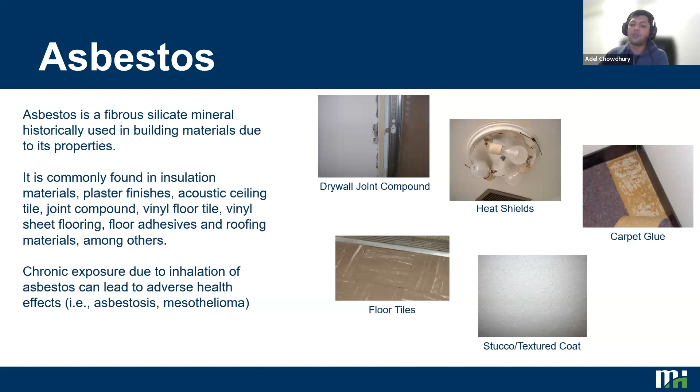You could have asbestos in door caulking, sealants, in textured coatings on paints, interior and exterior, on roofing materials, and some harder to get materials such as gaskets and mechanical insulation materials in special spaces like that.

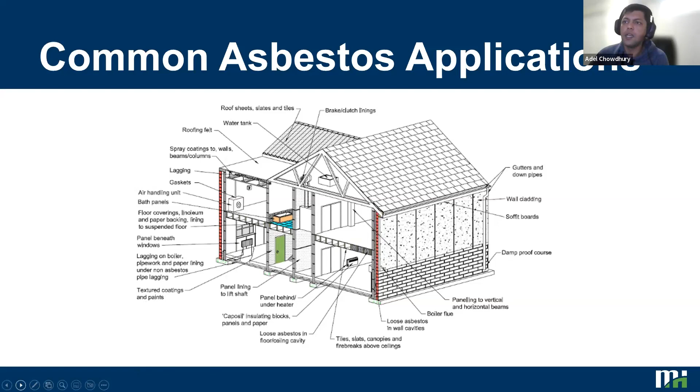Moving on to mold. Mold is also a common thing observed in residential condos, and it's more of a hazard because it often goes unnoticed for long periods of time. It can be hidden behind walls or above in attic spaces. Now, mold is a fungus that grows in the form of multicellular filaments. It produces spores. The spores are what is harmful.

Generally, as I was saying, it's found in damp, dark, steamy areas. It could be in bathrooms, kitchens. If you have a recent flood, it's in basements, plumbing spaces. Areas with poor ventilation are also a good source for mold.

And the hazards of mold vary depending on people and their susceptibility. Most common symptoms are runny nose, eye irritation, skin rash, cough, congestion, aggravation of asthma. Again, it's a fungal spore-based hazard. So the main idea is if you see mold growth, as you can see, there would be some signs of it.

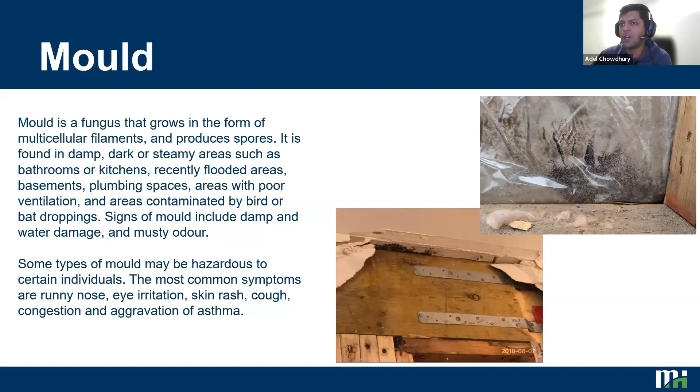The signs would be moldy smell. You would see dampness where dampness shouldn't be. You would see signs like these black spottings where mold is growing. They generally require a substrate to grow on, and the most common, very good substrate is insulation material, drywall, anything that a fungus can grow on. It wouldn't be, for example, a concern on metallic surfaces.

Now, there are other designated substances, and I'm not going to go too deep into them because the applications of all these designated substances can be pretty extensive. They can be found commonly in most residential places, but a lot of these designated substances are also more focused on commercial and industrial spaces as well. So I'll just focus on a few that are more commonly found in residential spaces, lead being one of them.

Lead is commonly found in old paint. Now, under the regulations around lead, it's still allowed. Legally, you could have up to 90 ppm lead in commercial residential paints available right now. So it is available. It is something that is not based on time, whereas asbestos, for example, is more of a concern in older houses.

Lead could still be present in newer houses, especially in specialized paint or paint on specialized surfaces, like paint on metals, paint on utility pipes, reflective paints, things like that, which would still have high lead content. Now, the issue is they can cause developmental and behavioral problems in children. So houses with kids are a special concern for lead.

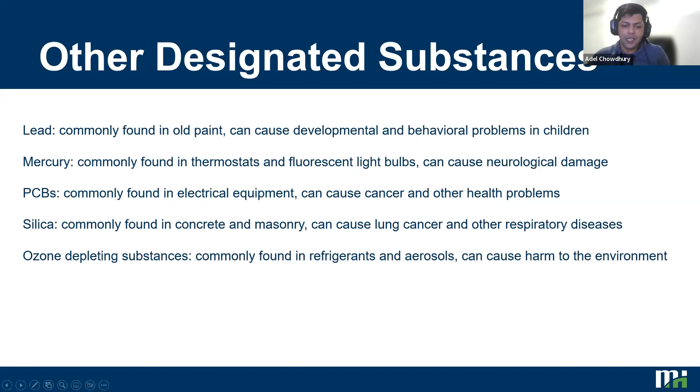Now, quickly to touch base on the regulations, there are, as I mentioned, regulations defining designated substances, and regulations that are in general present to guide us for how to manage hazardous materials. There are two acts specifically that are pertinent in Ottawa or in Ontario. That's the Occupational Health and Safety Act, and there are two regulations under the Act: Reg 490/09, designated substances, and 278/05, designated substances specifically for asbestos on construction projects. And the other act is the Environmental Protection Act.

Now, the Occupational Health and Safety Act, in general terms, specifies duties of owners, employers, and others to protect workers from health and safety hazards on the job. These duties include taking precautions to protect workers, acquainting a worker or a person in authority over a worker with the hazards in the workplace, and handling, storage, use, disposal, and transport of hazardous materials. The Environmental Protection Act, on the other hand, is for the protection of the environment and managing hazardous waste in a safe way.

Now, Section 30 of the Occupational Health and Safety Act specifically requires that a list of all designated substances at a project site be provided to all bidders at the tendering stage, and that the constructor for a project shall ensure that each prospective contractor or subcontractor for the project has received a copy of the list before entering into a contract. So this is where the regulation really starts applying.

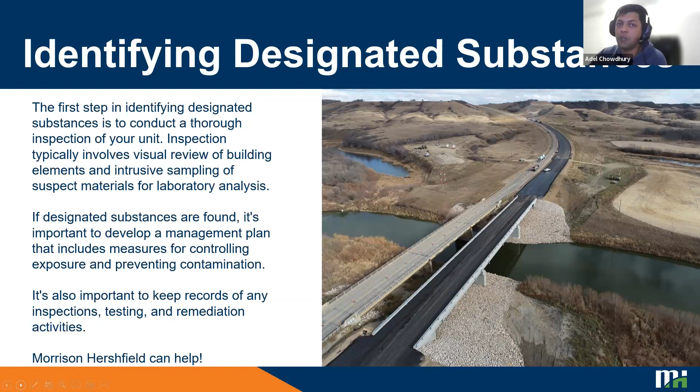And Morrison Hershfield can help. Environmental consultants in general can help. Consulting services available by consulting engineers: designated substance survey, as I had mentioned. Now, there are two types of designated substance surveys. You could consider a baseline designated substance survey or a project-specific designated substance survey. A baseline survey would be you carry out a designated substance survey of your entire property, where the consultant would go and inspect a reasonable number of units to represent the whole condo complex, to identify any designated substances present, and they would prepare a report that would cover the whole property.

Whereas a project-specific designated substance survey would be if you have a project in mind, for example, let's say you're doing a siding replacement for your building. We would only look at the areas to be impacted by the project and identify any designated substances there to provide to the contractor directly who is working on the project. Now, that may not apply to the rest of the property. It would mostly be specific to the project area itself.

Now, the service does include a visual inspection, but it also includes intrusive sampling of suspect building elements. So during a designated substance survey, there will be minor damages to building elements as we collect a sample of, let's say, drywall joint compound or a ceiling tile or a piece of floor tile. And we would do patch repairs where we can and try to find places for sampling that are more inconspicuous, not right in front of you. The other thing is the DSS generally does not include sampling of inaccessible or embedded materials. Now, this is a concern if you're doing a very large scale demolition project. You might want to discuss a much more thorough investigation, which could be more intrusive.

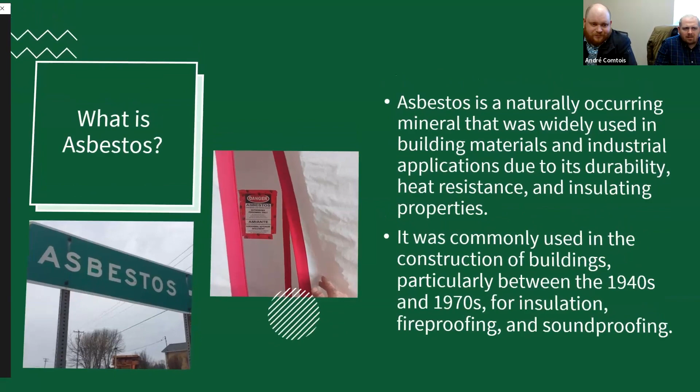So the health risks and exposure to asbestos. Asbestos fibers essentially are microscopic, but they're too big to expel from the lungs. So typically the health issues that you can encounter if you're exposed to asbestos are all lung related. So mesothelioma, lung cancer, asbestosis, these are potential health issues that could arise due to exposure to asbestos. And none of those end very well.

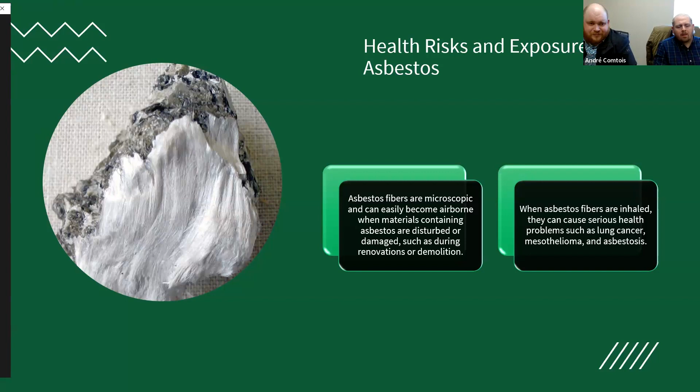So what is asbestos abatement? Well, asbestos abatement is basically the entire process of getting asbestos-containing materials out of the building. It refers to the process of identifying, removing, and disposing of asbestos-containing materials, or ACMs. Oftentimes, if anybody hears the term ACM and is wondering what's an ACM, well, it's an asbestos-containing material.

Most homeowners don't like us going around shouting asbestos, so we typically just refer to these materials as ACMs. So, removing those from buildings, structures, and other areas where they may pose a health risk. Asbestos abatement typically involves a team of trained professionals who use specialized equipment and techniques to safely remove and dispose of these ACMs.

It's important to note that any reputable company advertising asbestos abatement work should be using trained abatement technicians, workers and supervisors. It's specialized training, and then they get certified by the Ministry of Trades in Ontario, Ministry of Labour, as certified workers and supervisors.

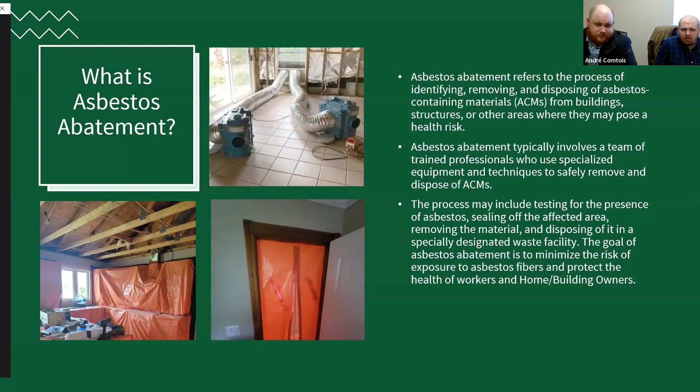So when does asbestos abatement need to be done? Just because a material in a residential building is flagged as asbestos containing doesn't necessarily mean that it needs to go away. I've had that conversation with a lot of homeowners and building owners that say, oh, I hear there's asbestos here, so can we get it out? Well, it's a costly measure to get it out, so we need to specify why. Why do we need to get it out?

Either the material itself is compromised, or there's an alteration you want done. If there's asbestos in your plaster or drywall joint compound and you're planning on tearing that wall out, then it'll need to be abated properly beforehand, for the health and safety of everybody involved. But on its own, as long as asbestos is not disturbed, there is no concern. You're not going to be exposed to it just because it's present in the plaster on your walls or the vinyl flooring on your floor.

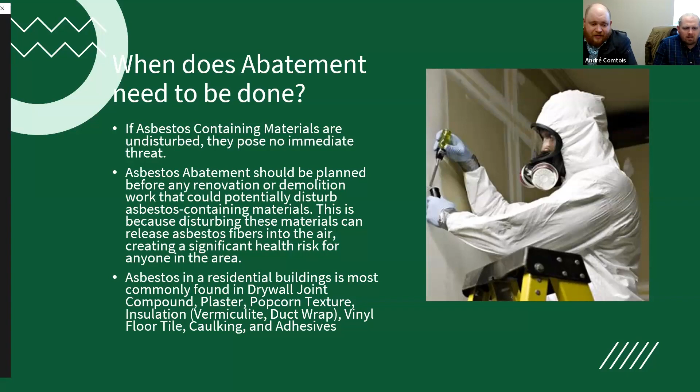Again, asbestos is found in a lot of building materials. Adel had a great slide showing all the different materials that can be used in a residential setting. So how do I know if a building material contains asbestos? Well, unfortunately, we can't see or smell asbestos. I can't taste it. If I could taste asbestos and tell you that material contained asbestos, then I'd be a lot wealthier than I am today. But unfortunately, that's just not the way it is.

Honestly, the regulation states that any building built in 1986 or older would require a DSS or asbestos testing done to identify those materials, because it's a flip of a coin whether a material contains it or not. Some of them have a higher percentage, but for a drywall joint compound or plaster, no one is going to be able to really tell you that it contains or it doesn't just by looking at it. These materials need to be looked at by a professional under a microscope, and they determine the size and scope of what we're dealing with.

So a contractor should not perform any demo work prior to knowing whether materials are asbestos containing. So if anybody comes to you and says, don't worry about that, we'll just knock it down, it's illegal. If you know the building is 1986 or older, by law, no contractor can come in and do that demolition work without being informed and doing it the proper way. And a way that we find out if building materials contain asbestos or not is if a designated substance report or survey is present and is able to tell us that information.

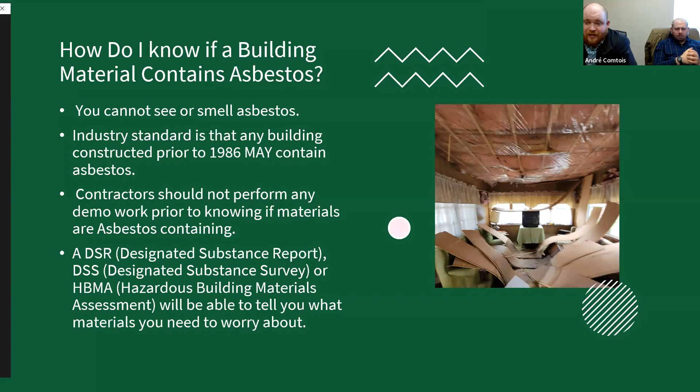So I'm going to pass it along to the handsome gentleman beside me to keep going.

All right, so the designated substance survey: why as a contractor we like to get a copy, when we need it, and what it helps us do for our work. As Adel mentioned, the DSS gives us, the contractor, a report to identify the materials that need to be abated according to regulations. For instance, if we go into a building under an emergency situation where demolition is required right away and there's not a DSS available, then most likely the work will have to be done assuming that it contains asbestos, just to protect the workers, the homeowners, anyone involved on site.

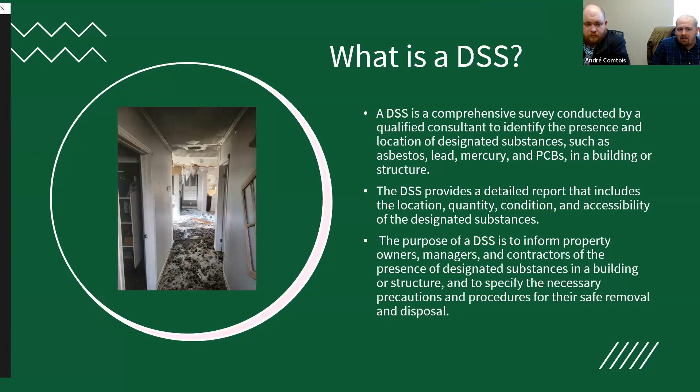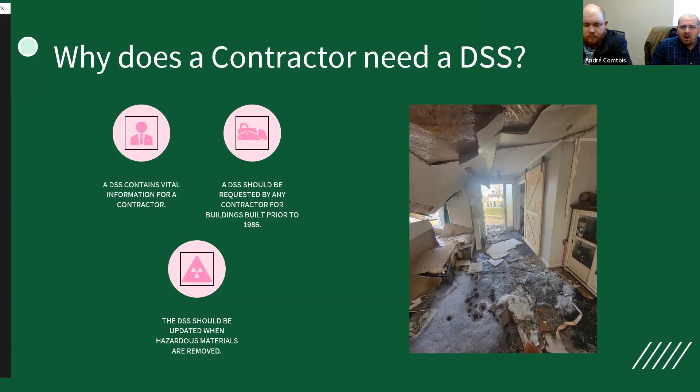The DSS provides us detail on the conditions and the quantities of the materials, and helps us put together a game plan on how to abate these materials. So it's very important for us to have a copy of it to come up with a proper game plan. Again, the DSS contains the vital information for the contractor, and it should be updated when hazardous materials are removed. As Adel mentioned previously in his slides, sometimes not all the materials present are identified in the DSS. If you uncover additional materials, maybe additional testing should be done prior to removal, but it gives us a good idea on how to proceed with the demolition.

Understanding the abatement costs, the different abatement types, what costs are associated with it, the labor intensity required for different types of abatements, and the materials required. So like I said, understanding abatement costs, the situation requires different procedures.

In Ontario, asbestos is categorized in 3 types. So type 1 being the lowest, and type 2, and then type 3 being the highest, where there's more labor intensive requirements and PPE required as well. So we'll go over this in the next few slides.

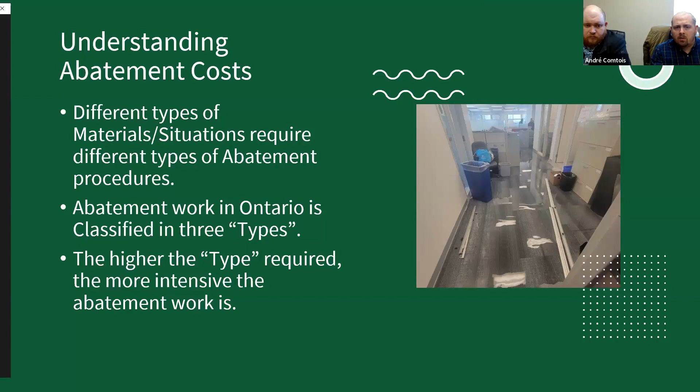So type 1 asbestos abatement, it's considered the least risky of the 3 types. Even if it's the least risky, it should still be done by a trained professional, someone that knows how to remove it properly and also how to dispose of it properly. The one thing that does not change in the 3 types is the disposal. All disposal of asbestos has to be done at a designated facility that abides by the rules.

For type 1 abatements, most of the time the materials are going to be wetted down to prevent dust. It doesn't necessarily require a dust control barrier, but it does require us to identify the work area, so there's no one walking through that work area while it's being done. So good examples often are vinyl tiles. They're going to be done as a type 1 because they're non-friable. They can be removed easily without using power tools, without creating too much dust.

Another good example of a type 1 situation would be exploratory openings for engineers or someone to review certain conditions in a building. If you have to do inspections around windows or doors, it's known that the drywall joint compound contains asbestos, but it's such a small amount being removed, under 1 square meter. A lot of times type 1 asbestos is what is required, so it can keep costs down as well.

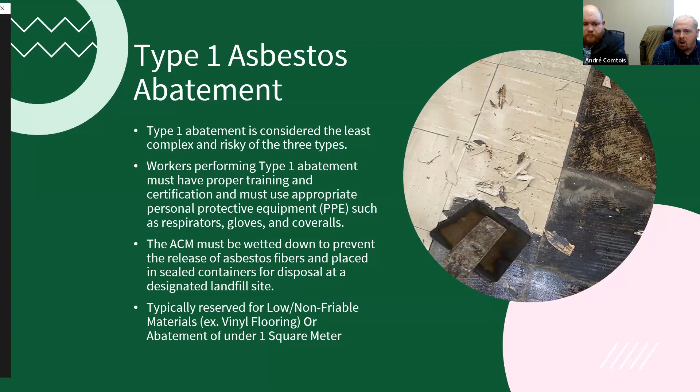Now, type 2 asbestos abatement, it's a bit more severe than type 1, but less than type 3. Type 2 abatement, all work has to be isolated using dust control barriers. We install a HEPA filtered air handling unit to create negative air pressure within the work environment. So the way it's set up is that there's no dust that can get out of the work environment, and it's all filtered through the HEPA filter, which is also disposed of at the end for proper disposal.

So type 2 asbestos requires 2-stage containment with a clean room and dirty room. Those rooms serve a purpose for, again, dust control, and also for the workers to suit up before entering the work area, so they're not putting on a mask with respirators and cartridges and coveralls in the living room of a tenant or unit owner, and raising more questions. And the containment setup, obviously we don't decide that this needs to be done. This is part of the regulation. The government of Ontario puts out requirements that we have to follow.

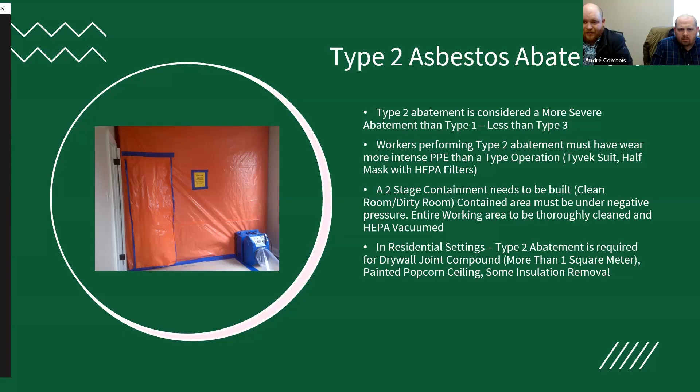Now, type 3 asbestos abatement has a lot more requirements, which adds additional cost to a project. Typically it requires a 3-stage decon. So you will have your clean room and your dirty room, just like a type 2 abatement, but it also includes a shower in between them. The shower is used to wipe down anything that comes out of containment, and all the water is collected at a basin at the bottom of the shower. That's also disposed of as hazardous material.

There's advantages to use type 3 in certain situations where, as of type 2, you're not allowed to use any power tools. So all type 2 is done with hand tools only, but type 3 allows you to use power tools. So depending on materials being removed, if there's something a bit harder to remove with hand tools only, you would use power tools to do the type 3. It helps us work a bit faster.

Typically requires more intense PPE. The PPE will be a bit different for the workers as well. They'll be wearing powered air respirators to breathe in. They also typically have to put in a shower. The guys and the equipment and everything gets showered in, showered out, just because it's typically a higher level of contamination, or potential contamination, because these types are typically defined by how friable a material is, and the friability of a material is essentially just how easily it can be pulverized into dust and breathed in.

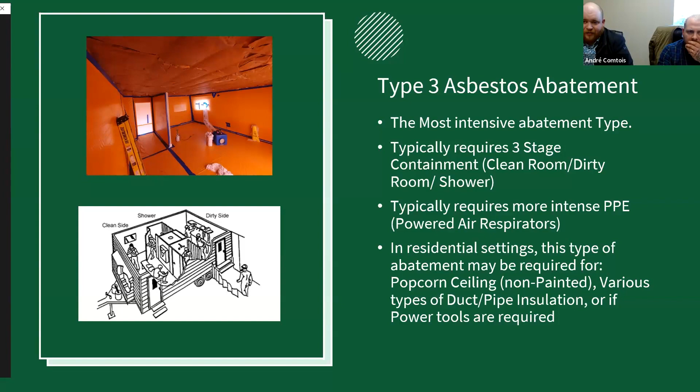The equipment used in abatement. One of the most important equipment used, I think, is the PPE. It starts with the PPE because the workers are exposed to it frequently, weekly. They can be on projects for many weeks. That's what they do every day. The respiratory protection includes respirators with their proper cartridges, such as P100 cartridges that are required for abatement work.

The respirators are all fit tested to each individual worker. We keep up to date with it as well. Every 6 months, they have to get tested to make sure it's a proper fit. Also, any major weight gain or weight loss requires another fit test to be done. It's something that's taken seriously to make sure that the workers are protected. Then there's the coveralls that they wear. So basically the workers are covered head to toe, everything's sealed in, so you don't get any particles on them.

Sorry, maybe it's just me, but when you lean back, I can't hear you as well as when you were forward. Sorry. There you go.

So yes, they wear a coverall. So basically the worker is covered head to toe, sealed. They have gloves, boot covers, so they don't track it outside of containment or bring things back home on their clothes, outside of the work environment. There's HEPA vacuums that we use. Those are vacuums a bit similar to regular construction vacuums, but with the inclusion of a HEPA filter inside that filters all the particles as the work is being done to mitigate the dust. There's the negative air machines. Those are the units that we use within the work environment to create negative air pressure.

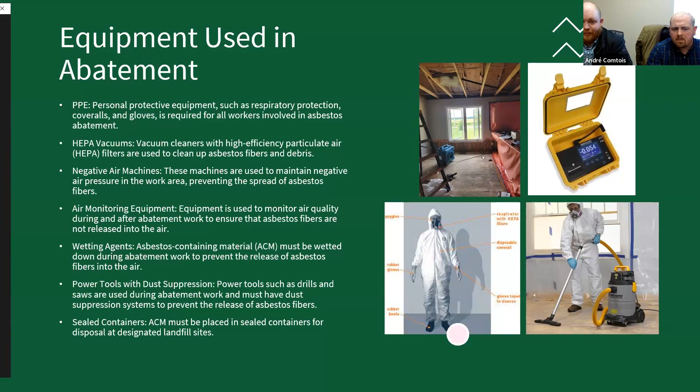Other hazards that may require a trained technician. So there's other hazards than asbestos that we come across frequently. Mold growth, as Adel covered in the previous slides, just to go over it from the contractor's perspective, the work is a bit similar to asbestos abatement work, whereas a proper containment needs to be set up to mitigate cross-contamination.

Similar PPE is worn by the workers. The one difference I would say is in the disposal. Asbestos waste has to be disposed of as hazardous material, whereas mold growth, if it doesn't contain any asbestos, is still double bagged, but then disposed of in a regular waste bin.

So it's also important to note that while asbestos is regulated by the government, as there are ways to abate it and dispose of it, there is no such regulation in Ontario for mold remediation. There's a process to mold abatement work, but it is a recommendation. It's a heavy recommendation because, as Adel had mentioned, there's different sensitivities to mold.

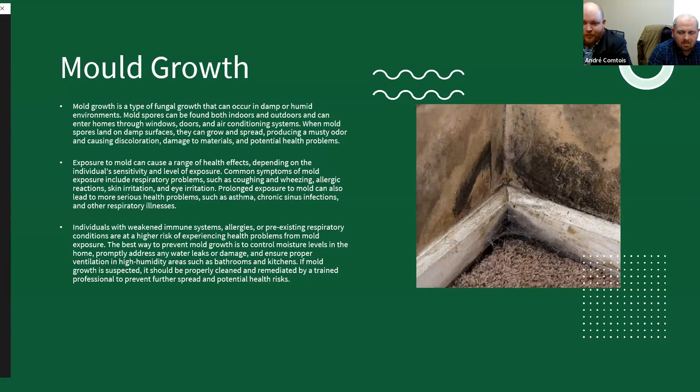Crime scene and post-mortem cleanup. Blood and bodily fluids can be a risk to whoever comes in contact with them. I'm sure that's another scenario that some property managers and building managers have come across in the past. Unfortunately someone is deceased, there's body fluids remaining in the unit, and it needs to be removed and disinfected.

There is different PPE recommended for body fluids cleanup or needles and sharps removal. We'll come across a situation where a unit will have sharps, needles left behind. Now the PPE changes a bit, where the workers are more conscientious of not getting a puncture or cut while working in those environments. It's very important.

So the PPE recommended might be Kevlar gloves, which are puncture resistant, a face shield to protect your eyes as you're removing those materials, and a mask to protect your mouth. That's another thing to consider, getting a certified technician that knows how to remove it, disinfect the area properly, and also dispose of it properly. Other situations we've seen are hoarder cleanups and animal cleanup.